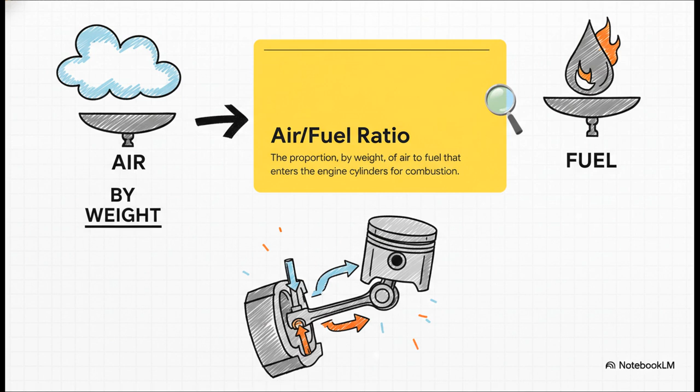At its heart, this is all about one thing, and one thing only: the air/fuel ratio. Now, look at the critical words here: by weight. We are not talking about volume, we're talking about mass. We are managing the precise weight of air versus the precise weight of fuel that's going into that combustion chamber. This ratio, it dictates absolutely everything that happens inside that engine.

So let's build a bridge between theory and practice. You see, there's a chemically perfect ratio, and then there's the operational reality of flying an airplane. In a lab, the ideal ratio is one thing. But up in the cockpit, trying to operate at that ideal can be completely disastrous. Understanding why is absolutely non-negotiable.

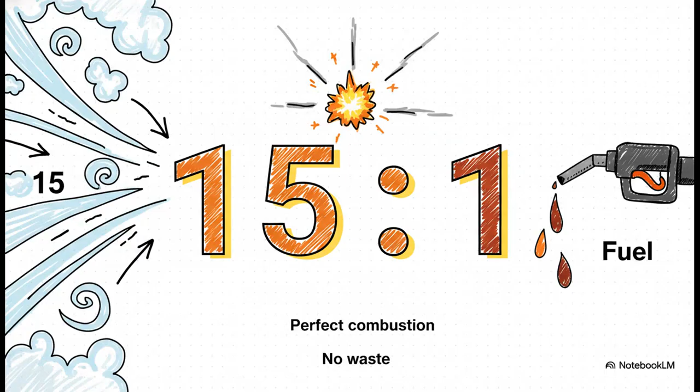So here's the number right out of the textbook: 15:1. That means 15 parts of air to 1 part of fuel by weight. This is what we call the stoichiometric, or the chemically correct ratio. And in theory, it's beautiful. At this ratio, every single molecule of fuel combines perfectly with every available molecule of oxygen. There's no waste. It's perfect combustion.

So you're probably asking, why don't we just fly at 15:1 all the time? Well, because perfection has a price. This chemically correct ratio produces the absolute highest possible combustion temperatures. And heat is the enemy of a piston engine. This kind of extreme heat can lead to detonation. That's an uncontrolled explosion in the cylinder, not a smooth burn, and it can literally destroy an engine in seconds.

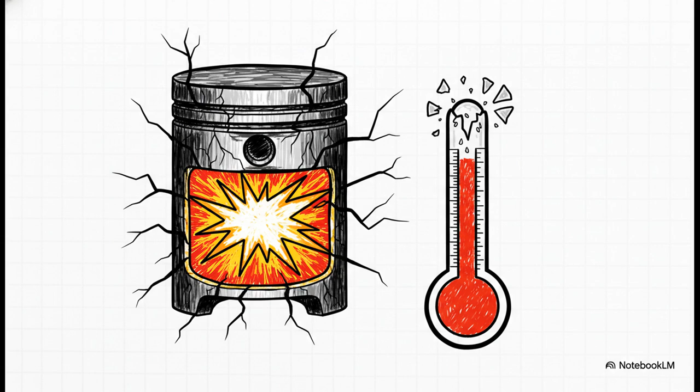And because of that danger, we operate in two practical regimes, on either side of that dangerous temperature peak. For high-power settings like takeoff and climb, we operate on the rich side, around 12.5:1. We are deliberately feeding the engine more fuel than it can possibly burn. Now that excess fuel isn't wasted. As it vaporizes, it acts as a really powerful internal coolant. Then, for lower power settings, like in cruise where we're generating less heat, we can safely operate on the lean side, maybe around 18:1, and prioritize fuel efficiency.

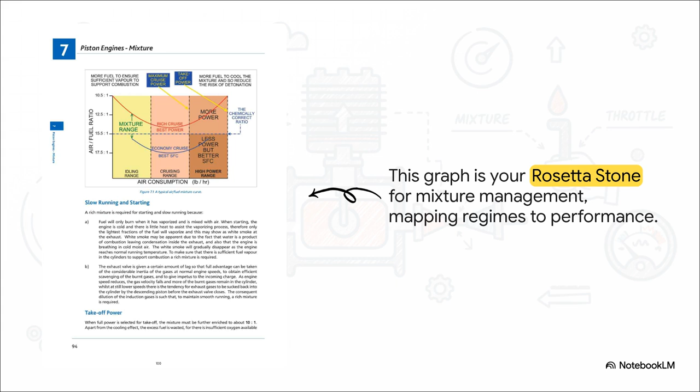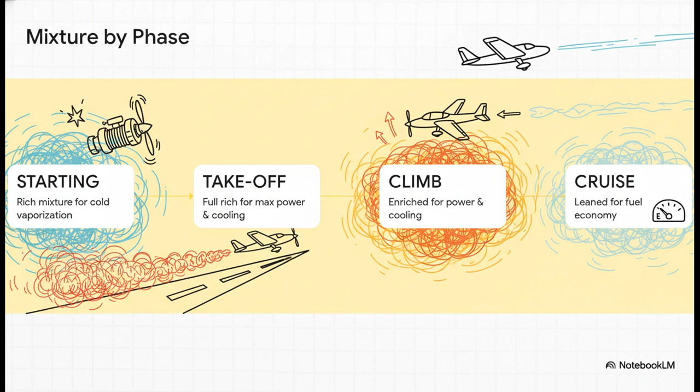All right, enough theory. Let's put this into practice. We're going to walk through exactly how a professional pilot manages the mixture lever through the 4 main phases of flight. We're going to examine these 4 very distinct phases of flight. Each one has a totally different power requirement, and because of that, a totally different mixture philosophy.

Okay, starting the engine, especially a cold one, we need a rich mixture, and the reason is just simple physics. Cold fuel does not vaporize easily. So by shoving an excess of liquid fuel in there, we're making sure that there's enough vapor present in the cylinder to actually mix with the air and create a charge that will ignite.

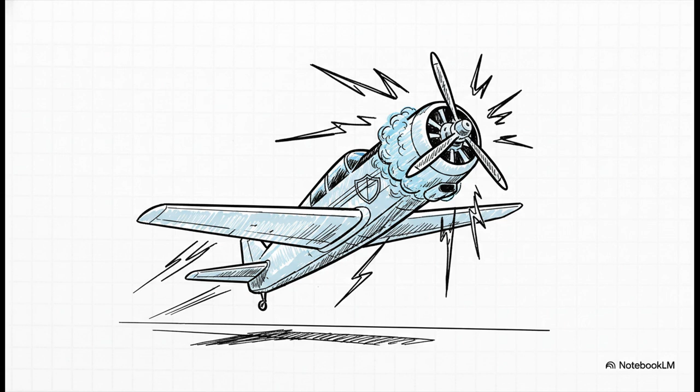Takeoff. This is the moment of maximum stress on your engine. We go to full rich, a ratio of about 10:1. Now this does 2 things at the same time. First, yeah, it gives us maximum power.

But second, and honestly, more importantly, it provides maximum internal cooling from all that unburnt, vaporizing fuel. This is absolutely non-negotiable for protecting the engine. Now, during the climb, power demand is still really high, so we maintain an enriched mixture, maybe around 11:1. The logic here is exactly the same as takeoff. We are prioritizing engine health and preventing detonation by using that extra fuel as a coolant while we're demanding high

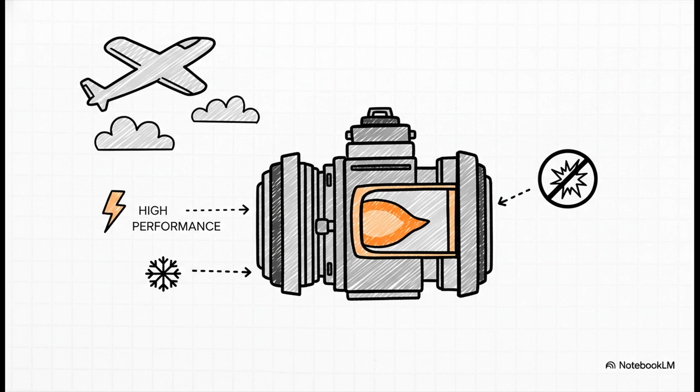performance from it. So once we finally level off at our cruise altitude and pull the power back, the mission changes completely. The priority is no longer maximum power, it's maximum efficiency. This is where we lean the mixture significantly, to a ratio somewhere around 18:1. And look, this isn't just about saving a bit of fuel on one flight. A pilot who consistently and correctly leans the engine extends its life, reduces maintenance costs, and frankly, shows they're a true professional. So how do we actually achieve this precise leaning in cruise?

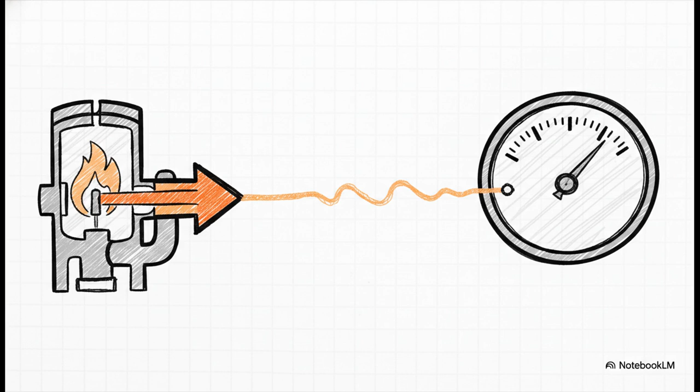We don't guess. We don't use some old rule of thumb. We use our instruments. Specifically, we use the EGT gauge. This is the tool that gives us a window, a direct look right into the combustion chamber. The exhaust gas temperature, or EGT gauge, is your single most important instrument for setting mixture accurately and safely in flight. It gives you a direct indication of what's going on in the combustion process by measuring the temperature of the gases as they leave the cylinder.

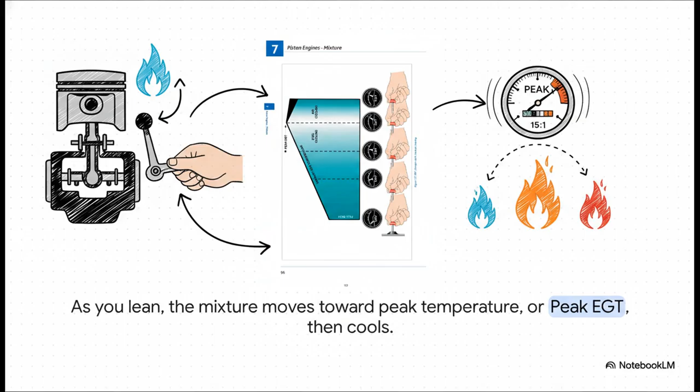So imagine you're flying. As you slowly pull that mixture lever back, you're reducing the fuel flow. Now watch the EGT gauge, it will start to rise. Why? Because the air/fuel ratio is moving closer and closer to that hot-burning, chemically correct 15:1 ratio. The temperature will keep rising until it hits a maximum value, we call that peak EGT, and then if you keep leaning past that point, it'll actually start to drop again. That highest temperature you see, that is peak EGT.

And I need you to understand this. Peak EGT is your landmark. It's your signpost. It tells you precisely where that 15:1 ratio is. It is a reference point that you find, but it is not, I repeat, not a target for continuous operation. Once you find peak EGT, you will then adjust the mixture, usually by enriching it just a little bit, according to the aircraft's pilot operating handbook.

Okay, before we get to the interview practice, just one final, critical reminder of the consequences. Getting this wrong isn't just inefficient, it's incredibly dangerous. You see, running the mixture too lean for a given power setting creates a whole cascade of failures. It starts with overheating. That leads to power loss. Then, the slower combustion can literally burn and warp your exhaust valves. And ultimately, this can all lead to the most destructive condition of all, detonation. This is exactly why precision is not optional.

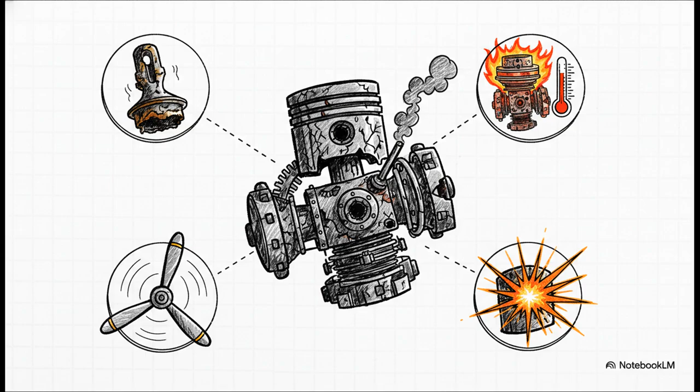Something like this. For takeoff, we require maximum power, but operating at the chemically correct ratio of 15:1 would create dangerously high engine temperatures. By enriching the mixture to approximately 10:1, the excess, unburned fuel vaporizes, providing an essential cooling effect that protects the engine during this critical phase of flight. See? That answer shows complete comprehension.

Okay, next up, they'll probably give you a practical scenario. They want to know you can actually apply the theory. They want to hear your procedure. Here is how you nail that answer. Describe your action, your observation, and your final procedural step. For example, as I slowly lean the mixture, I'll observe the EGT rising as it approaches the chemically correct ratio. I will identify peak EGT and use that as my reference.

For best economy, I will then enrich the mixture slightly, as specified in the POH for our cruise power setting, to ensure I gain fuel efficiency while maintaining a safe temperature margin. Referencing the POH there, that's critical. It shows knowledge and it shows operational discipline.